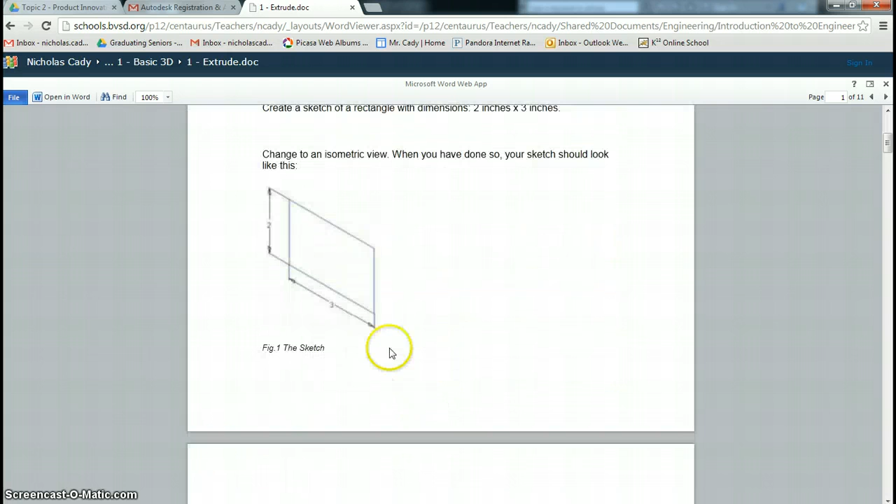First thing you're going to do is create a rectangle that is 2 inches tall, 3 inches wide, and you're going to extrude it to a depth of 1 inch.

So we're going to open a new part file. In Inventor, it's standard IPT that is the part file. And there it goes. We're going to start with Create 2D Sketch. That'll bring up the different planes. In this case, it doesn't really matter which plane I design on, so I'll go ahead and select one of them. I chose the right plane.

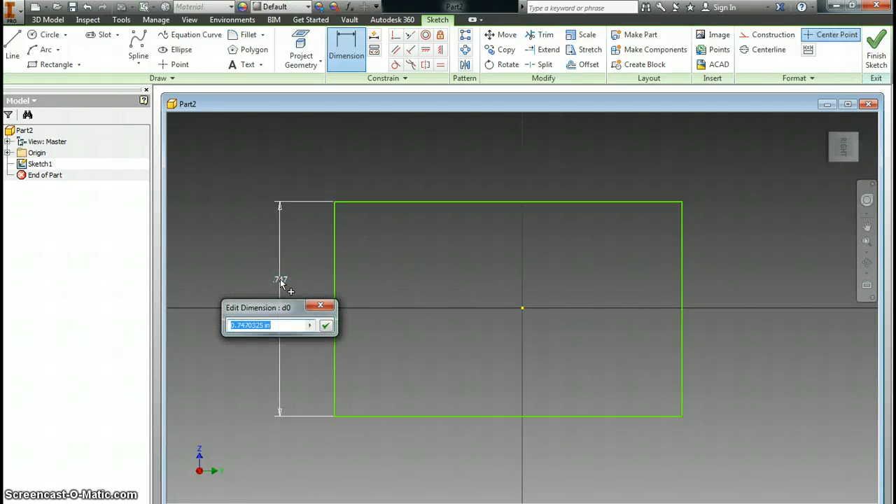Then I'm going to use Rectangle, and I'm going to click, drag, and click again. I'm going to go up to Dimension, click on this edge, pull it out, and tell it to be 2 inches tall. I need to zoom out a little, and make the width 3 inches wide.

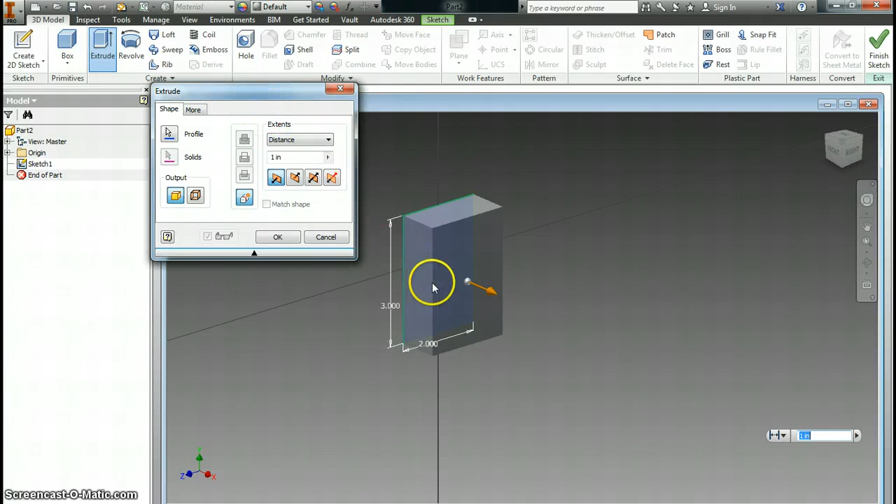And then I'm going to go up to 3D Model and go to Extrude, which is not my favorite view, but it's alright. We'll hit this arrow to expand the extrude box, and we're going to extrude this rectangle out 1 inch. So we'll say OK, and there it is. Maybe I'll look right at it and rotate it, and that's more of an isometric view right there.

And let's go back to the tutorial. The next step is, well, that's the finishing part of the first part of the tutorial.

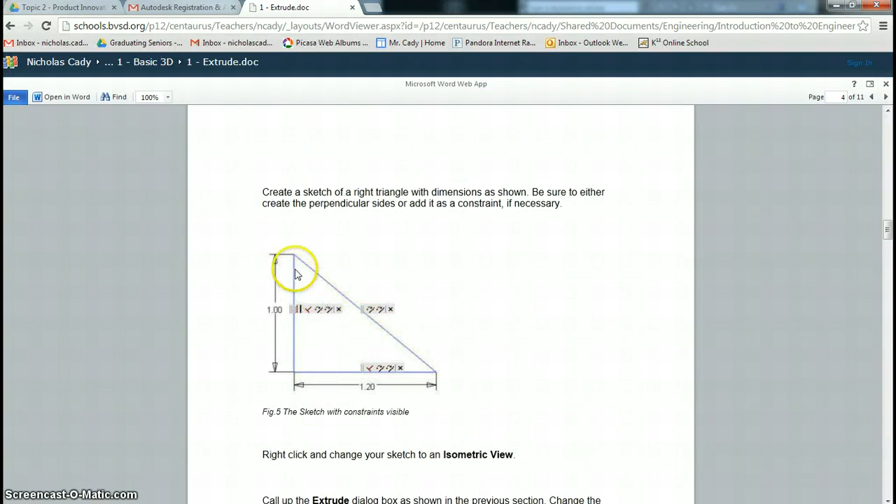Alright, step 2 on the extrude tutorial is making a triangle that's 1 inch tall and 1.2 inches for the base. We're going to extrude it back a depth of 1/2 inch, and we're also going to add a taper to it of 10 degrees. So as it extrudes back, it's going to get bigger. You can see that in the end product here, that the triangle actually gets bigger.

So we'll go to Inventor. We're going to open a new part file. And this time, instead of using rectangle, first we're going to go to Create Sketch. This time, we're going to use Line. I'm going to click, come down, click, come over, and then connect my triangle.

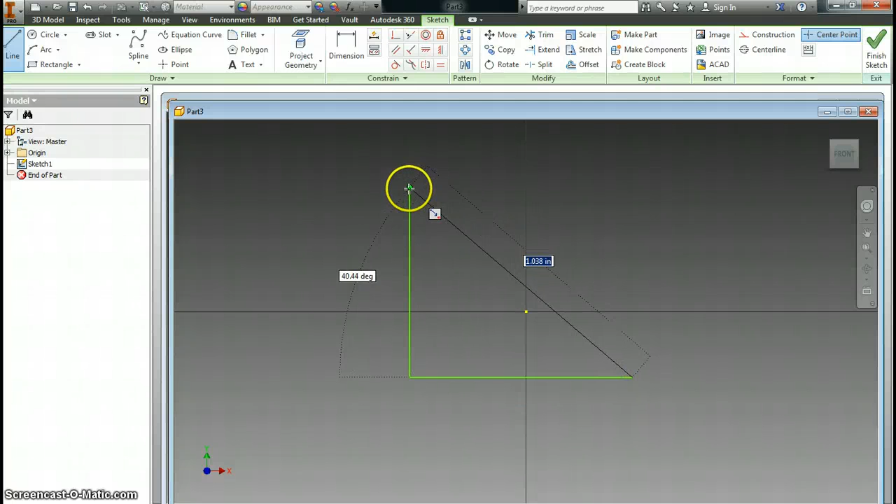I'm going to go to Dimension. I'm going to give it a height of 1 inch and a base of 1.2 inches. And it's going to look like that.

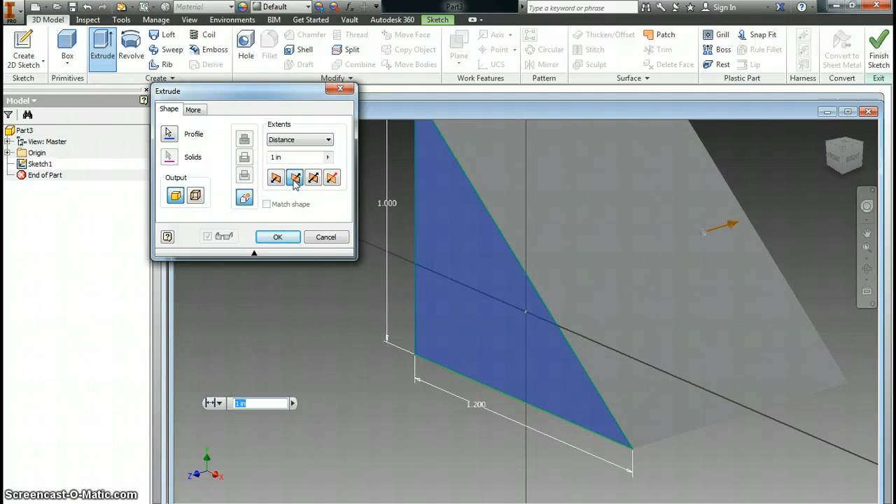Now I just need to go to 3D Model and Extrude. And when I select that triangle, it'll come out. If I wanted to go backwards, I could switch the direction of the extrusion. So maybe I'll have it go backwards. The total distance should only be 1/2 inch, so we'll put 0.5.

And if I click on More at the top, I have the option to give it a taper. I'm going to give it a 10-degree taper, and that is going to make the extrusion enlarge the triangle as it goes back. So if we hit OK, there it is. That is the second design of the extrude tutorial.

The third design of the extrude tutorial has to do with the creation of a rectangle and then the cutout of a triangle inside of it. The rectangle we're going to make has the dimensions of 1.25 inches by 0.75 inches in height, by 0.5 inches in depth.

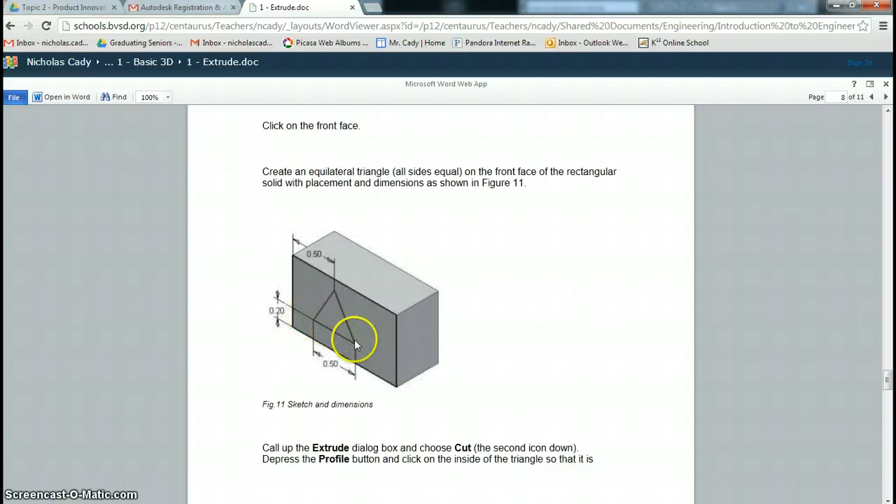So you're going to create that rectangle, and it's going to look like this. Then we're going to put a triangle. It's an equilateral triangle, 1/2 inch on each side, 0.2 inch off the top, and 1/2 inch off the left side. We'll put this equilateral triangle on the front of the rectangle. It's not perfectly centered, it's more to the left side of the rectangle. And then we're going to cut that triangle out of this rectangle till it looks like that.

So in order to do that, we will open a new Inventor part file, and we'll start with a sketch. Use the front face. We'll make a rectangle with dimensions of 1.25.

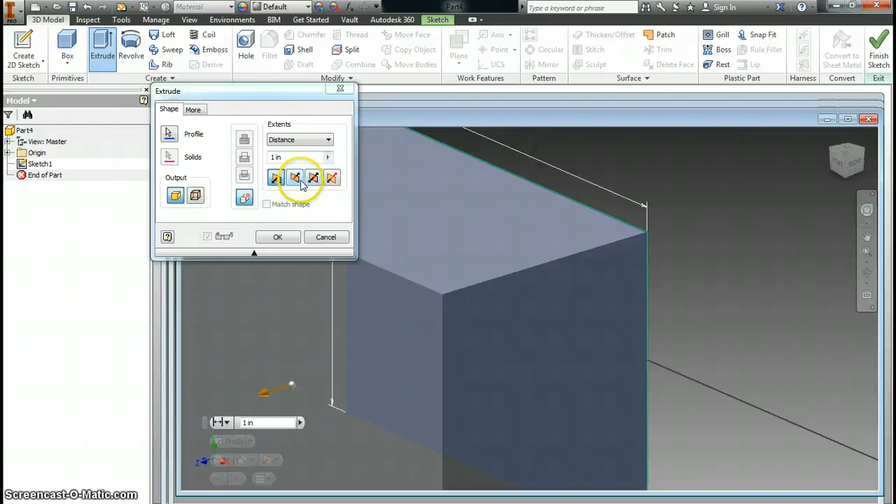1.75, and a height of 1.25. And we're going to then extrude this rectangle back 0.5 inches, and we'll say OK. And there's our rectangle. Now I'm going to look right at it, so if I click on the front face, I'm going to have this face, and I'm going to put a sketch right on it.

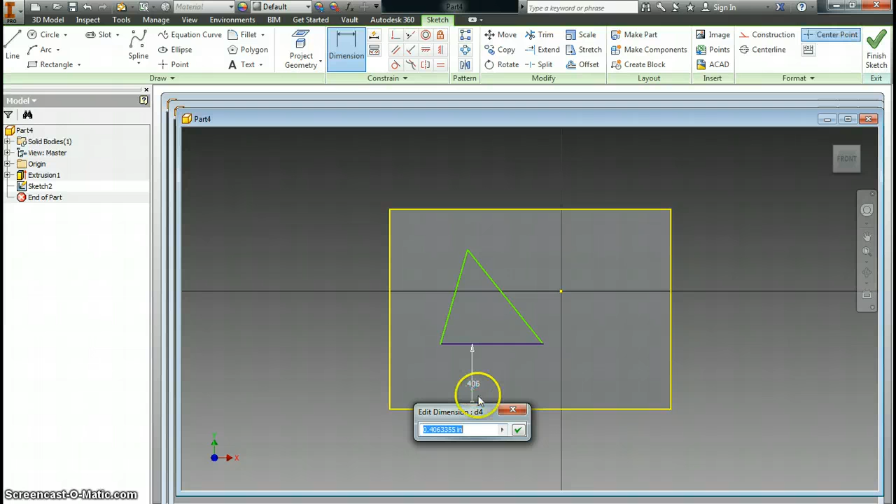And remember, I'm making a triangle. It's going to be equilateral, which initially mine won't be, but I will change it to make sure it is. The height from the bottom of this to the bottom of the triangle needs to be 0.2. Enter. And the width of the triangle is going to be 0.5.

Okay, and now each of the other sides, I'm going to bring out the dimension. If I right click on it, I can select aligned, and that'll give me this dimension, and I can make that 0.5. Or another way to do it is the constraints on the top. You see this equal constraint? I can just click on it, and I can tell this side to be equal to this side, and now I have an equilateral triangle. And I can tell the dimension from here to here to be 0.5.

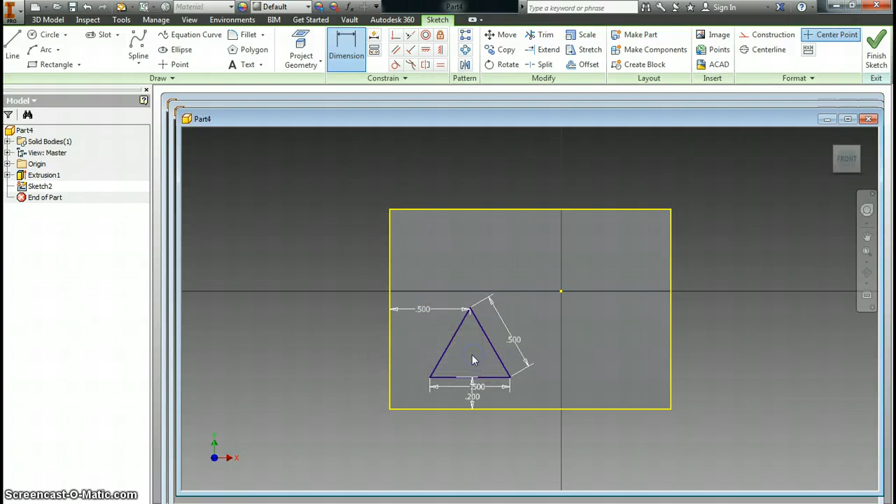And we say OK. And now does that look... that doesn't look like the one in the tutorial. Let me go back to those original dimensions: 1.25 by 0.75. Okay, so I'm going to go back and make an adjustment here. This will be good for you to see.

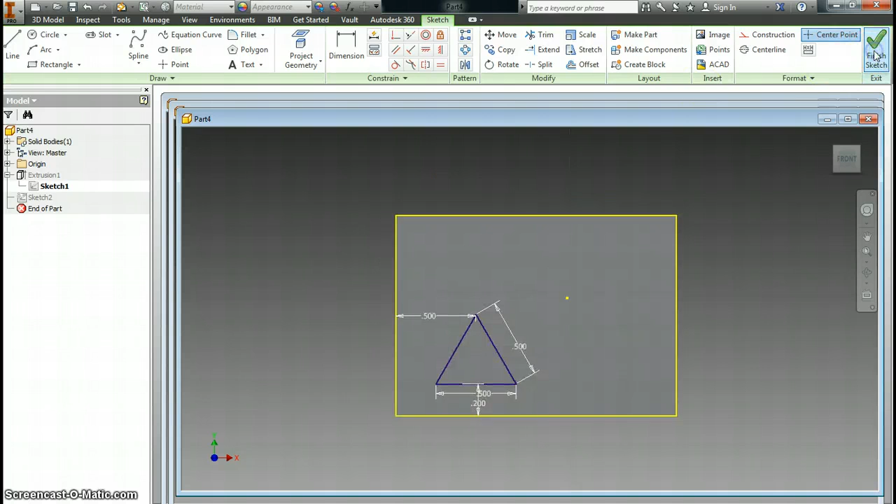I'm going to say Finish Sketch, and I'm going to edit the extrusion. The first one, I'm going to go to Edit Sketch and change the dimensions to 0.75, and edit dimension... 1.25. That's what it was supposed to look like. Now if I finish, now my rectangle looks much more proportional to the tutorial.

So now I can go to Extrude, Cut. I'm going to select this triangle in the middle, and it's going to cut the triangle through. If I hit OK, I now have this rectangular surface with a triangular cutout.

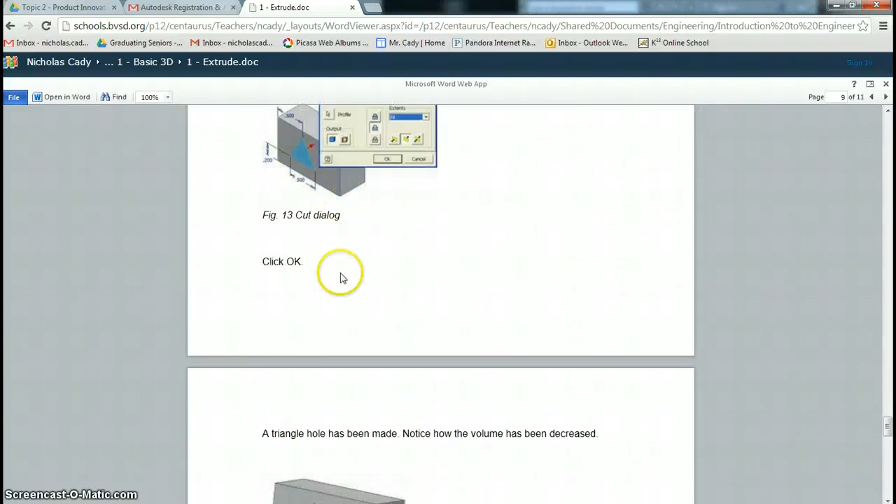And the last part of this tutorial, so there's the triangular shape, and then we turn it into a cutout, and we just created this. Now the last part of this tutorial is changing that cutout and actually making it an addition of a triangular shape out the front. And the way you're going to do that is go back into Extrusion 2, and we'll right click on it and go to Edit Feature.

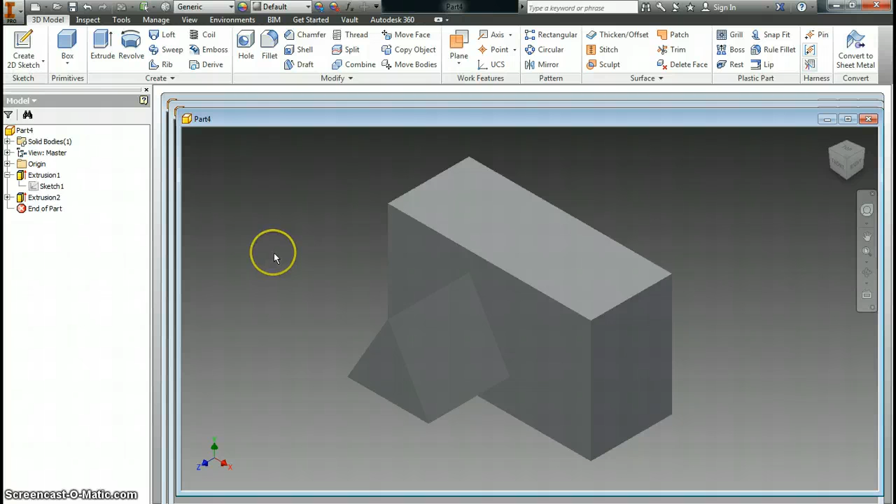And instead of doing a cut, we're going to add material. And instead of it going into the block, we're going to tell it to come out of the block. And we'll say OK. And now we have the rectangle with the triangular addition. That is it for the Extrude tutorial of Basic 3D.